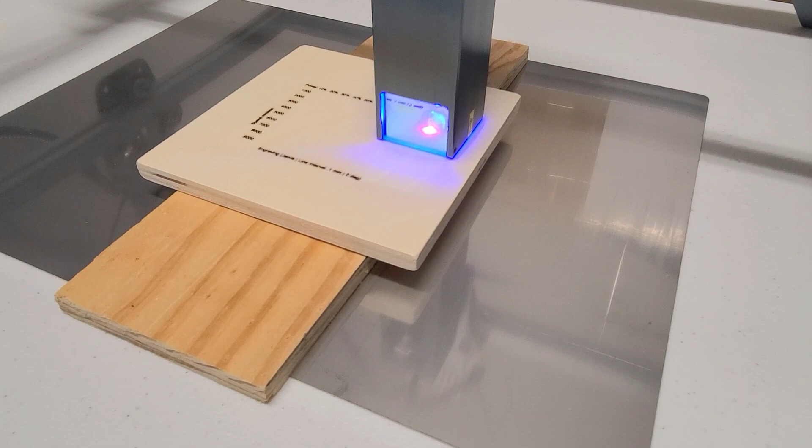Ever want to stick your toes into laser engraving? Well, stick around. This may be just the tool you're looking for.

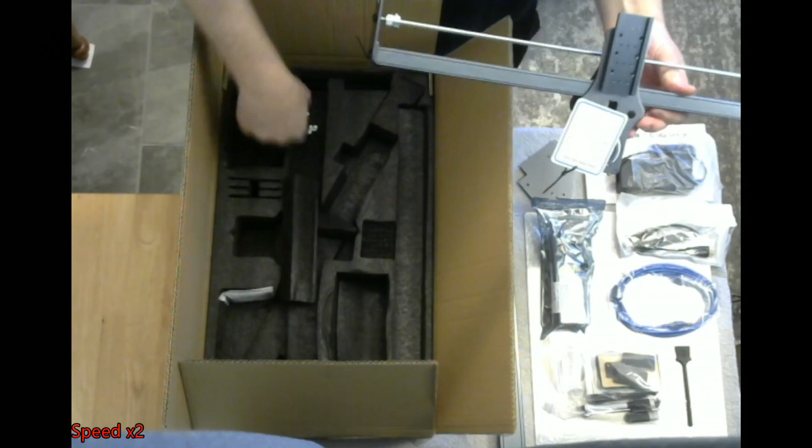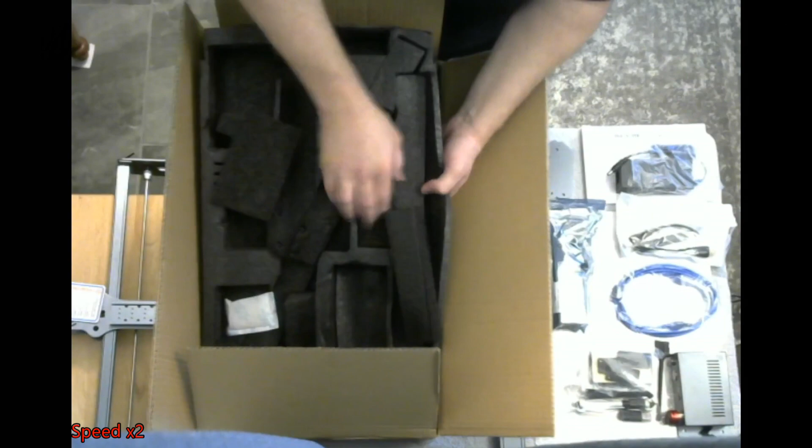One thing to be wary of, and I didn't realize, is that everything's on a single layer. I tried pulling it out looking for a second layer, but everything's on the first layer. They're just hidden in little cubbies with insulating foam between them. So once you think you've found everything, keep digging, because every time I thought I was done, I found another part hidden below something else. Keep digging, pull out the plastic or the foam to make sure that it's empty. You can tell by the weight that there's other things hidden in there, so keep pulling.

One last little plug on just how well they pack this thing: you can even see they put cardboard extra cutouts in the corners to make sure it doesn't get crushed. And it worked, because my Amazon box was crushed, but this thing was perfectly fine.

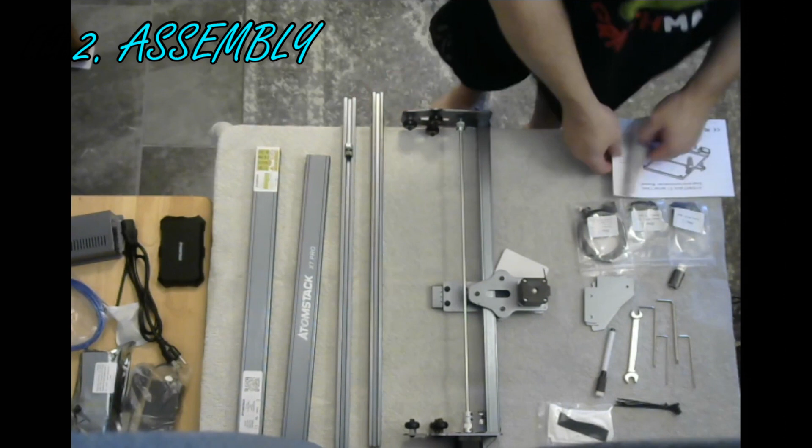Assembly itself is pretty straightforward and easy. It took me a grand total of about 30 minutes to unbox and put the whole thing together, but a good portion of that time was spent trying to show the various pieces off for the camera for this video. If you just dedicate yourself to assembling it, you could probably have it together in about 15 minutes, maybe faster if you don't bother looking at the directions.

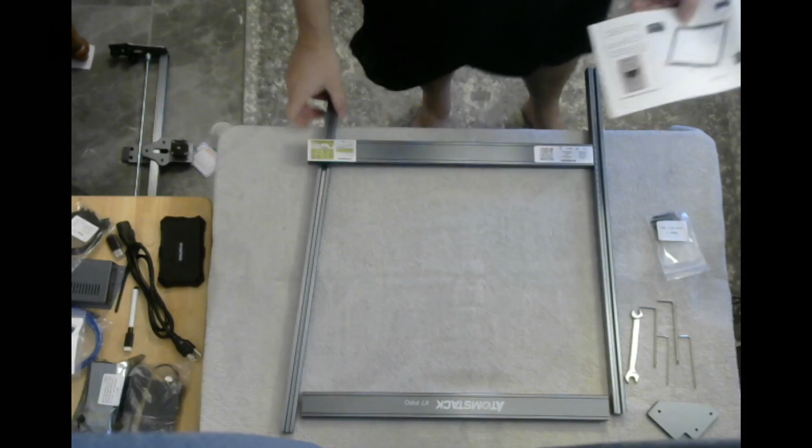First item on the docket is assembling the frame. It has a grand total of 8 screws, and it's nice and conveniently labeled. The bags, each bag is labeled by stage, as is the pictures for the construction. So it makes it really easy, really simple.

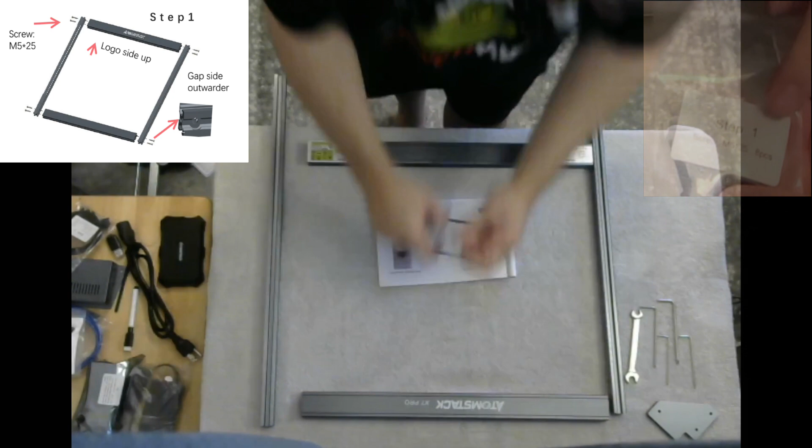The bars on the sides themselves have recessed holes that you can actually see so that screws fit in nice and flush and they don't stick out, so that they're not going to block anything. Make sure when you're laying out the frame that the side with the markings goes on the left side. This is also the side with the limit switch attached.

The easiest way I found to do the screws was to actually insert them by hand. Much faster than trying to do it with the Allen wrench, and there's actually plenty of screws sticking out to get a good grip and put them in most of the way.

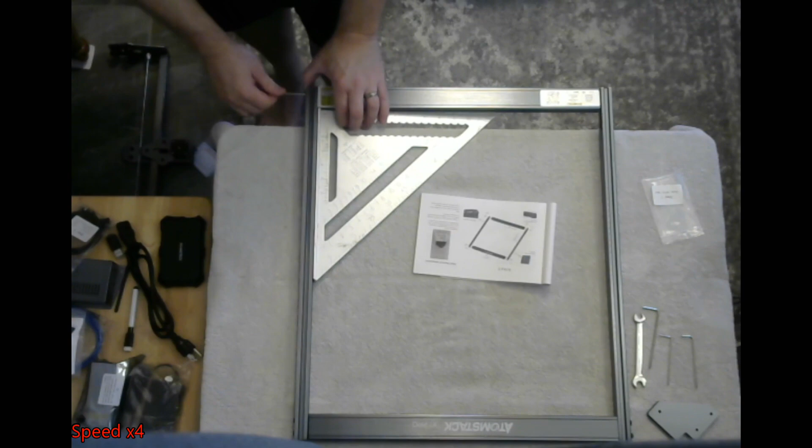Once you've got all the screws inserted by hand, then you can tighten them up with the Allen wrench. Now, while probably not necessary, I elected to use my carpenter square to make sure that all the corners were nice and square so that I wouldn't have any trouble when I put the gantry onto the frame.

Once everything's nice and square, make sure that all the screws are nice and tight. Now do be careful, remember these are just aluminum frames. If you over tighten it, you will strip them out, so be careful.

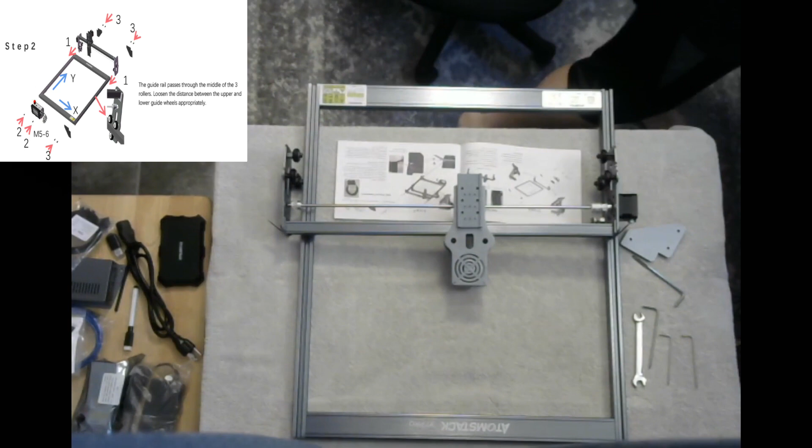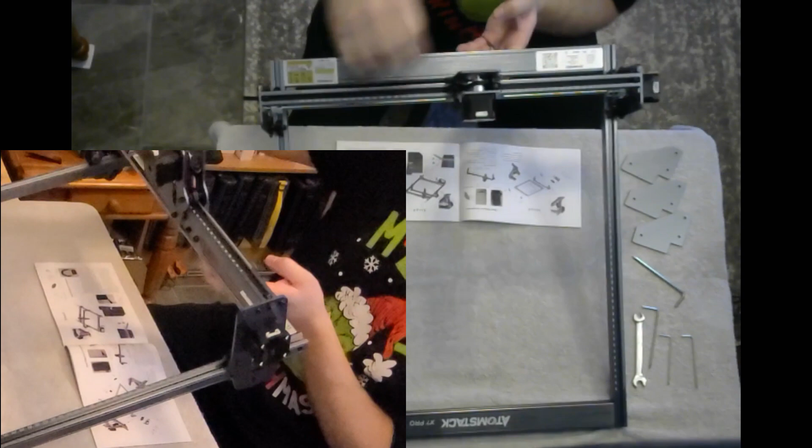In step number 2, we're going to be installing the gantry and the legs. Now this is where the manual and real world differ slightly. The picture I have up now is actually accurate. The one in the book, however, is a little bit vague on the installation process and has some errors in it. First, as you can see, the limit switch blocks gantry install from the front, meaning you have to install the gantry from the rear.

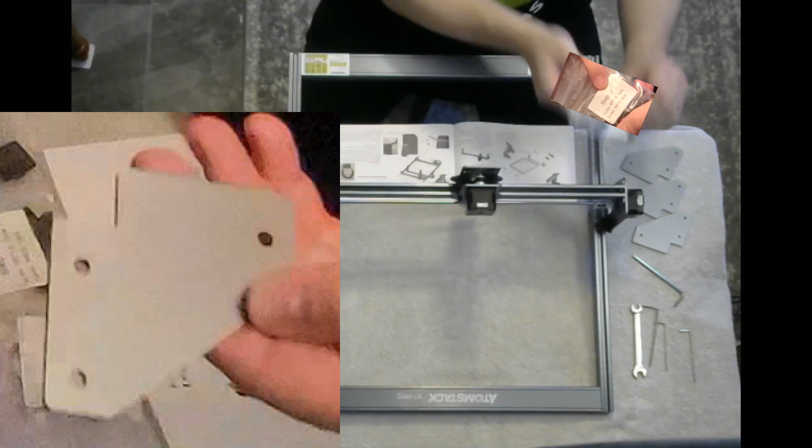Next, we're going to install the legs. There are 3 identical legs with 2 holes on one side and 1 hole in the other with a notch cut out at the 90 point. You're going to install it with the notch aligned to the outer edge and the 2 screw holes aligned to the top so they can line up with the holes in the metal extrusions.

Just as in step 1, there are 8 screws for this step as well, 2 for each one of the legs. You may notice that there's one smaller screw than the rest. This one actually goes into the control panel, which does both the control panel and acts as the front left leg.

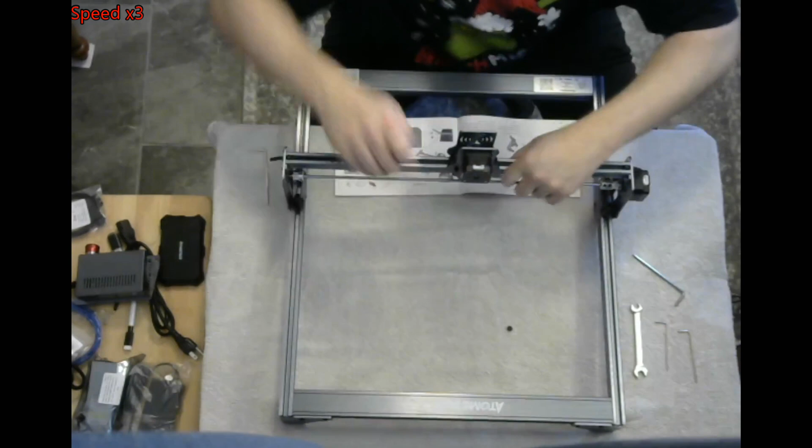This is also where the second error in the manual comes into play. The manual would have you install the front control panel leg now. However, if you do so, it will block you from being able to install the T-nut that's going to lock down the cabling on that side. So leave that one small screw out so that you can move the control panel out of the way, as I'm doing now, so that we can install the T-nut when we get to that point.

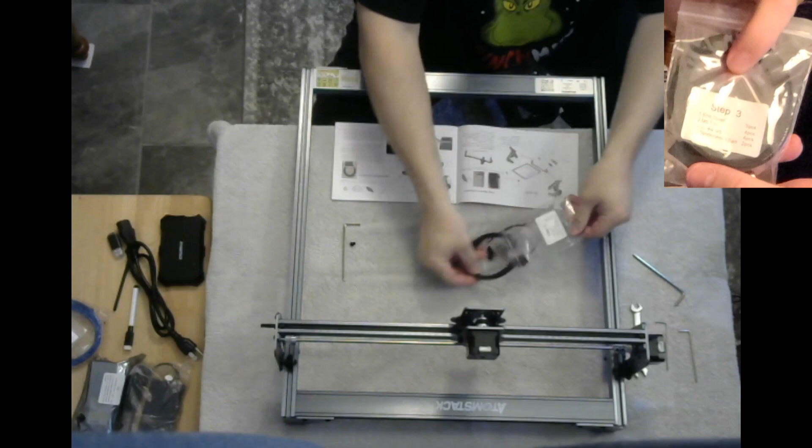And that brings us to step 3, which is by far the most challenging of the steps. Not that it's necessarily hard, but it's kind of tedious feeding the belts through to all the different pulleys. So take your time, go slow, use something that is not sharp edged. I used the Allen wrenches when I was doing it since they're nice and rounded.

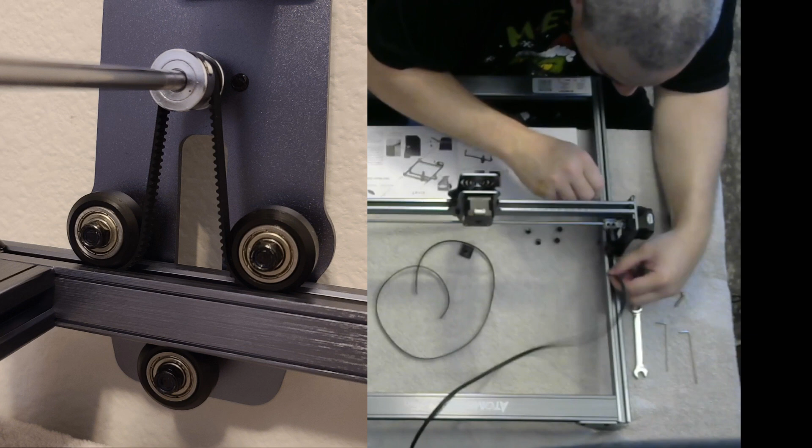That way you don't end up nicking, bending, or damaging the aluminum extrusions and thus causing problems with your wheels or the belt itself. The belt can be fed from either the front or the back. It goes under the outside wheel, through, up, over the sprocket, back down, and under the second wheel. Kind of hard to do, but like I said, patience and time, and it'll be alright.

When feeding the belt through, make sure the teeth are down, pointed at the timing gear. When doing the belts, I recommend feeding them both through before locking them down. It makes it a little bit easier to be able to move the gantry without it actually being stuck or having any resistance.

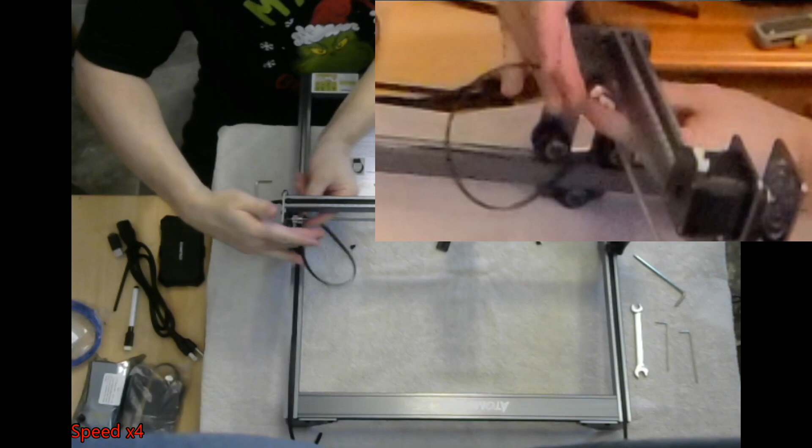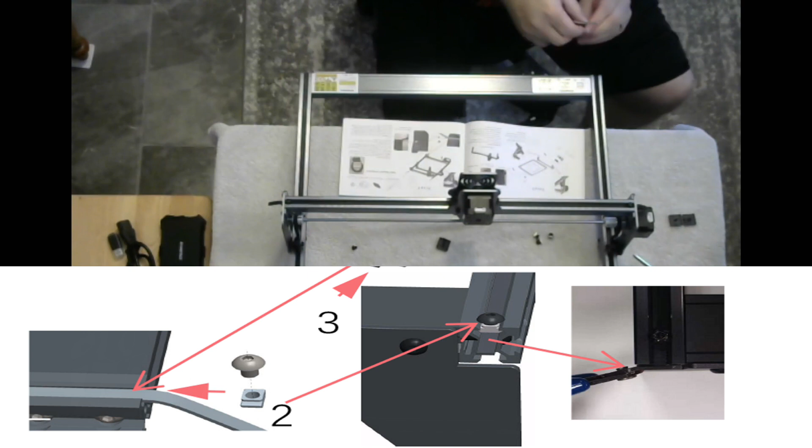Once we've got both belts installed, it's time to install the T-nuts. Essentially, you're just sliding these in and screwing them down to tighten on the belt to hold it in place. As you can see, this is why we left that screw out of the front panel plate. If you had installed it completely, we would have been unable to put that T-nut in and thus couldn't lock down the belt.

Now here's where the book and I differ. The book basically has you splitting the belts evenly between the front and the back. I elected to put most of the excess belt in the back and not to cut it off like the book recommends. I did this because I wanted to have both a little extra belt in case something went wrong, as well as I hope to maybe make and install some kind of belt tensioning device later on.

The lack of any kind of mechanical belt tensioner means that when installing the belt you need to make sure that it's at a proper tension before tightening down the second T-nut. Now when doing this, you want it tight enough that you don't have any play in the gears or in the pulleys, but loose enough that you're not putting any undue stress on any of the mechanics, because it'll wear out the machine that much quicker.

For the most part, just pull it snug, tighten it down, and then flick the belt a little bit. It should give a nice twang sound. Once you're done with the belts, you can install the second screw on the front console panel and complete this step.

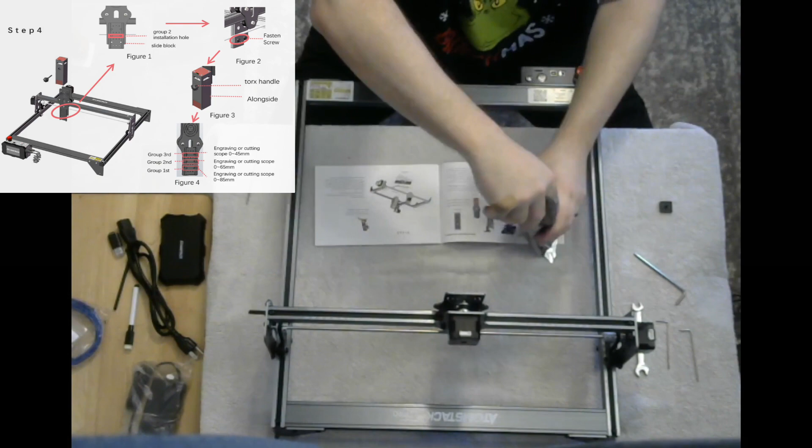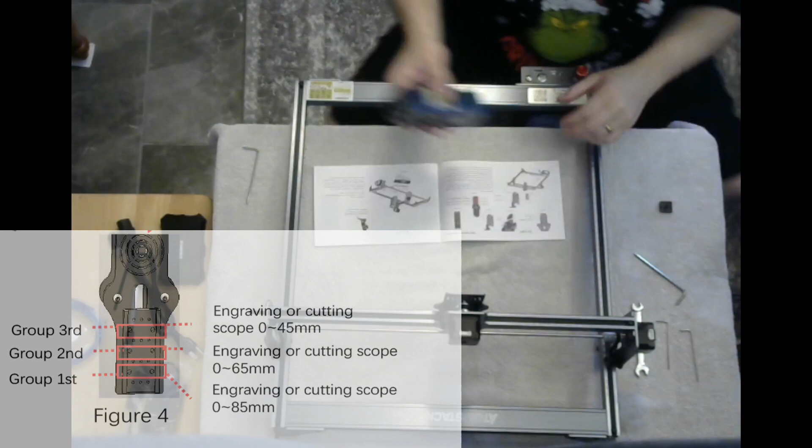Step 4 is arguably the easiest step of the whole process, being that all you have to do is unbag the laser, slide it down, and tighten it on. That being said, the manual does give a little bit of extra instruction so that you can adjust. There is a secondary plate that the laser mounts to that can be moved up and down to increase or decrease the amount of laser focus depending on the size of the items you may be trying to engrave.

Once you have the height adjusted where you want it, locking it down is as simple as twisting the knob on the front until it's snug.

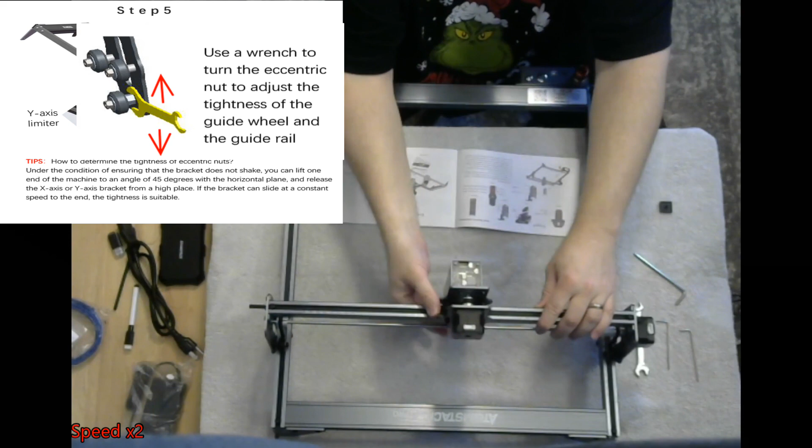In step 5, we'll be tightening the eccentric nuts on the X and Y axis. We want to tighten it down enough that the axis itself doesn't have any wobble or slop. However, we want to be careful not to over tighten them to the point where they will either bog down the motor or cause undue wear on the wheels.

And finally, in step 6, we get to hook up the cables. The cables themselves are zip tied together, connected to the main control unit. Be careful cutting them open or apart so that you don't cut any of the cables on accident.

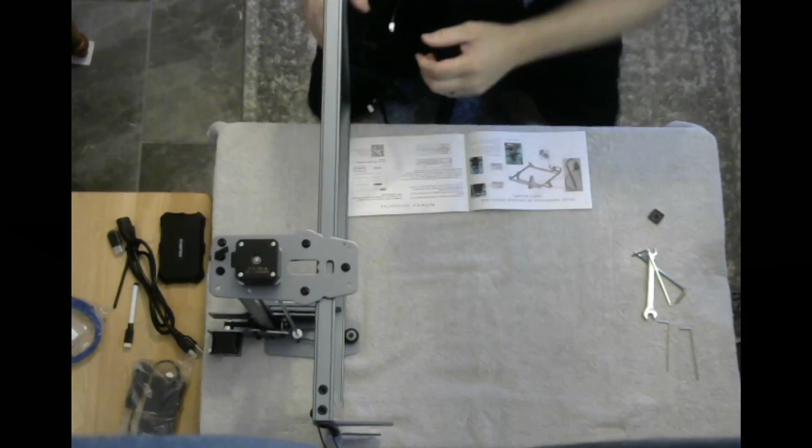Much like everything else on this engraver, AtomStack thought ahead, and the cables are very self-explanatory. The cable lengths and the connector types can only fit to one thing at a time, so it's very obvious what plug goes into what hole.

Once you've got all the cables connected, the next step is to zip tie them to the chassis itself. Make sure when you're zip tying them together that you leave enough slack in the cables that they can make full extension both on the X and the Y axes without getting any binding or plugging, and make sure they're not going to get wrapped or wound around anything else.

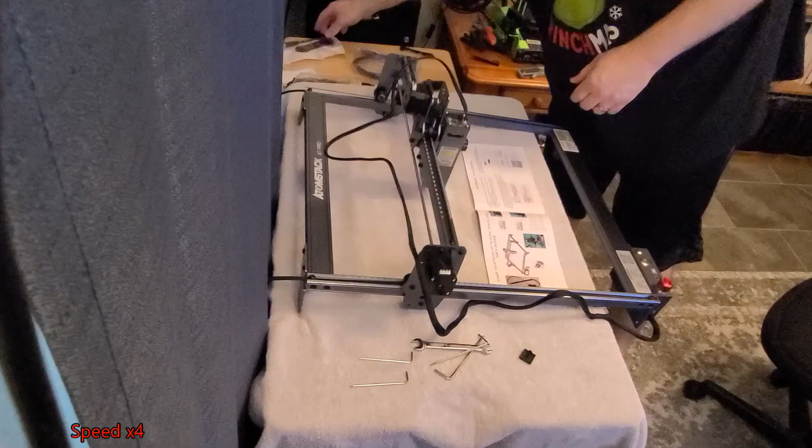Once you've got all the zip ties attached, the last thing to do is to hook up the control display with the supplied HDMI cable and plug it in.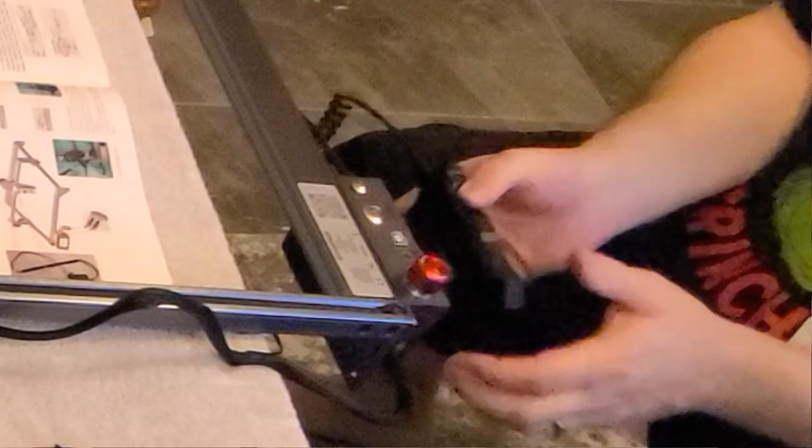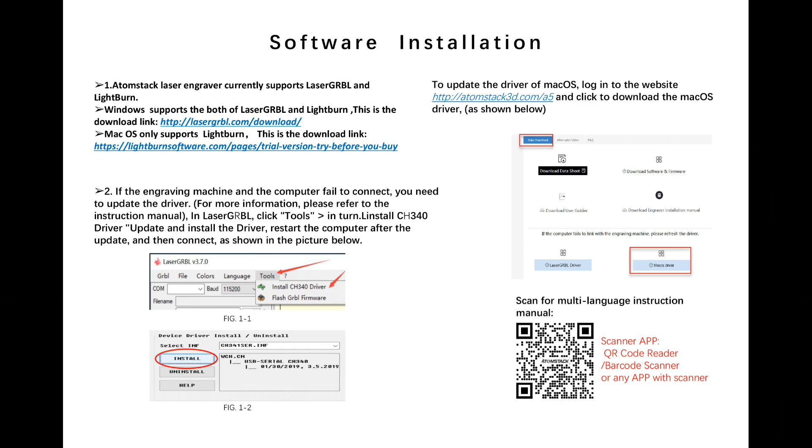The X7 Pro is compatible with both the free Laser GRBL, as well as the paid Lightburn software. The software installation page of the provided manual also gives the links to both of those softwares. However, it's probably faster just to Google them. Other than the links, the manual really doesn't provide any guidance on the software.

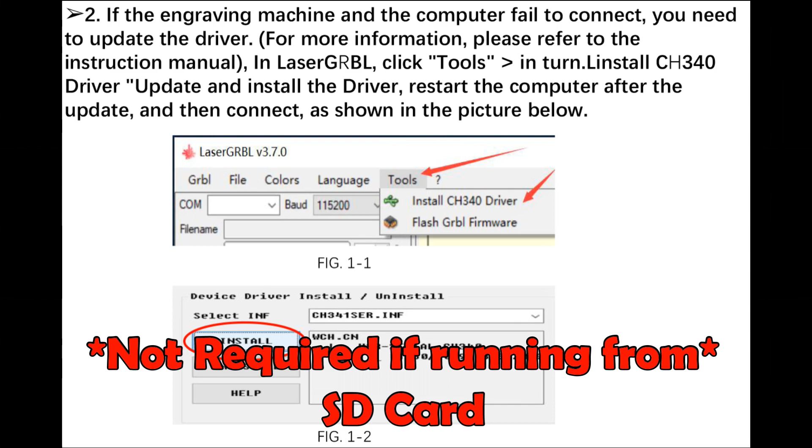Regardless of which software you choose to use, you will need to download the driver so that your computer can actually see your engraver. For those of you who have used the Wi-Fi Arduinos, you've probably already got this installed. If not, again, I will provide a link in the description.

I've elected to use Lightburn. Number one, it has more capabilities according to all of the different tutorials I've watched, and number two, it gives you a 30-day free trial.

After installing the software, you can start your free trial. Of course, you must accept their user agreement. Unfortunately, at the time of recording this, Lightburn is currently unable to auto-detect the engraver, so we're going to have to add it manually. To do this, select the Create Manually button, scroll down until you find GRBL, select it, and hit Next.

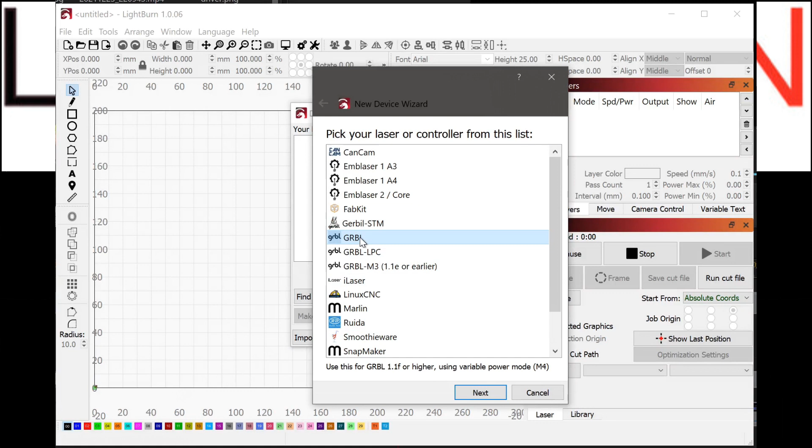From there, select your connection type. For us, it'll be USB, and then you get the opportunity to relabel your connection as well as set up the parameters. Now, if you're like me and you're not sure what the parameters are right off the top of your head, which one's X, which one's Y, no problem. We can find that out from the engraver itself.

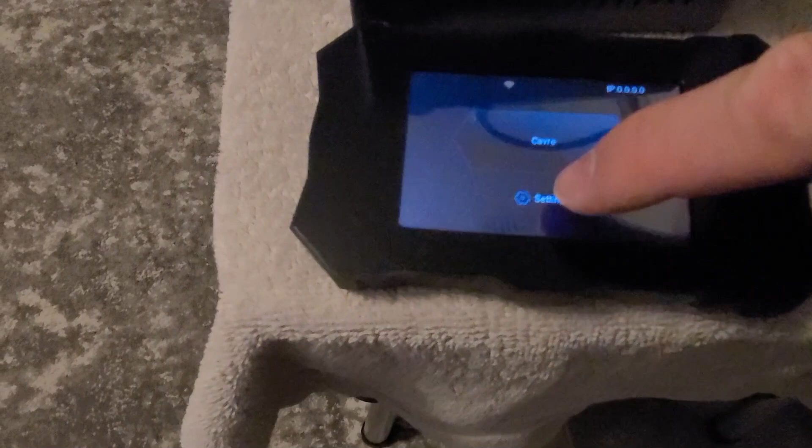Once the engraver is online, select Settings and then select About. This screen will show you your parameters for the engraver.

Now that we know the correct lengths for X and Y, we can enter them in the correct places and hit Next. Our limit switches are located on the left and the front, so we'll leave it selected for left front and then hit Finish. And with that, Lightburn is all set up, hit OK, and we're ready to start cooking.

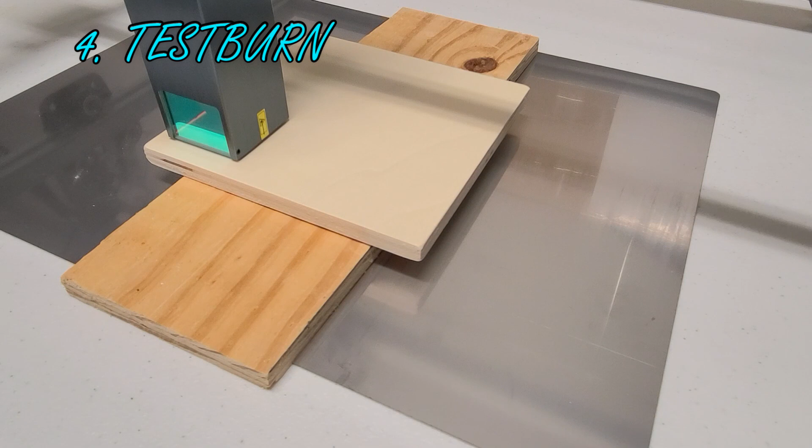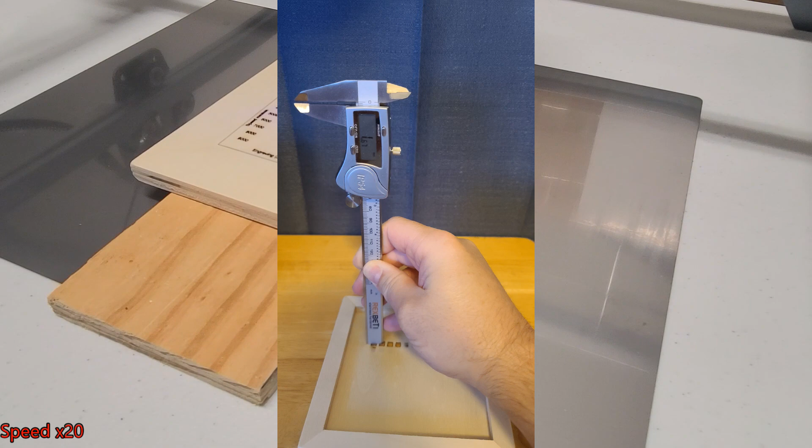To do my initial testing, my wife was kind enough to pick me up these nice little wooden blanks. I believe they're made out of birch, but the label doesn't specify. After running the initial test burn, I was able to measure the thickness, and they ended up being just over 1.5 millimeters.

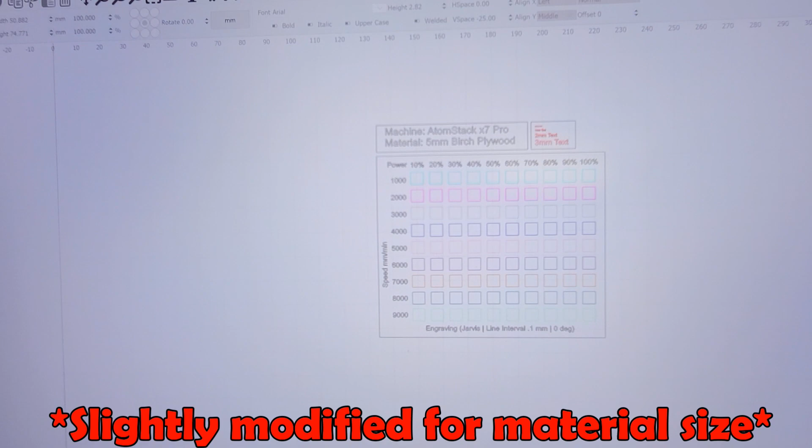For the initial burn itself, I used this grid made by Brandon over at the Make It Break shop, which does a good job of letting you test out both speeds and powers to see what the best settings are for the particular material you're trying to use. I'll put a link in the description so you can download that file and visit the Make It Break shop.

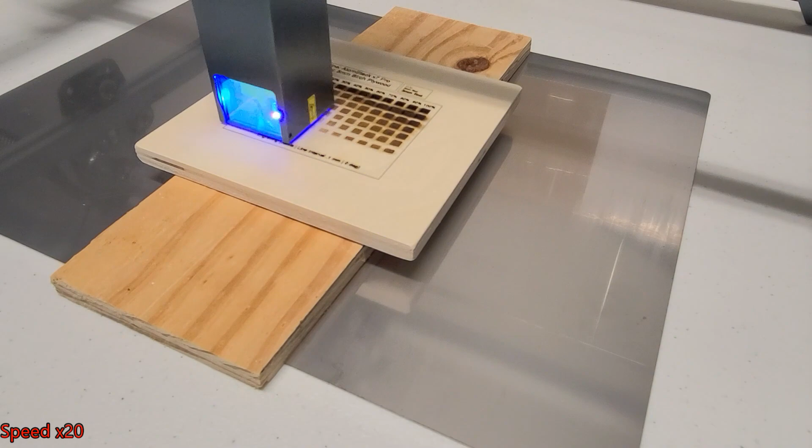The test file took about 15 minutes to run, and when it was done I was able to see which power and speed setting I thought looked best so that I could try out another burn.

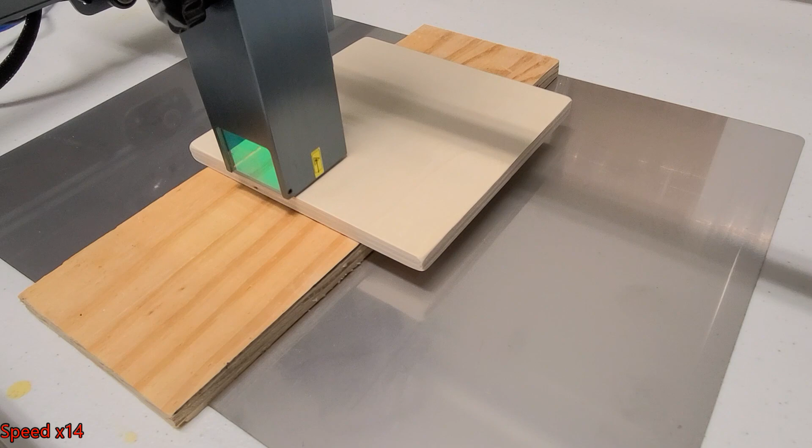Using what I learned from the first burn, I decided to make something a little different and make a picture for my son. Since my son's a gamer like me, I figured I'd find something game related, and since he's been playing a lot of Destiny lately, I figured I'd go with that.

I simply pulled up Google, typed in Destiny logo, and scrolled down till I found something I liked. Ended up going with the Raid logo, and I found one that had a nice black with a white background so that it would just do black and white. I figured for the first real picture, I didn't want to mess with grayscale or anything like that just yet, especially not till I get an air assist installed.

One thing that kind of caught me off guard is that the power to speed scale we used earlier to determine the best burn is in millimeters per minute. For me, Lightburn defaulted to millimeters per second, so the first couple times I tried to make this, it obviously didn't go very well. Once I figured that out and changed the settings inside Lightburn, it worked beautifully.

This image turned out to be about 5 inches by 5 inches after it was burned and took about 45 minutes. However, I did not do the fastest setting. I used 70% power with a medium speed setting for my first one. You could probably greatly increase speed if you tried a higher speed setting with a higher power.

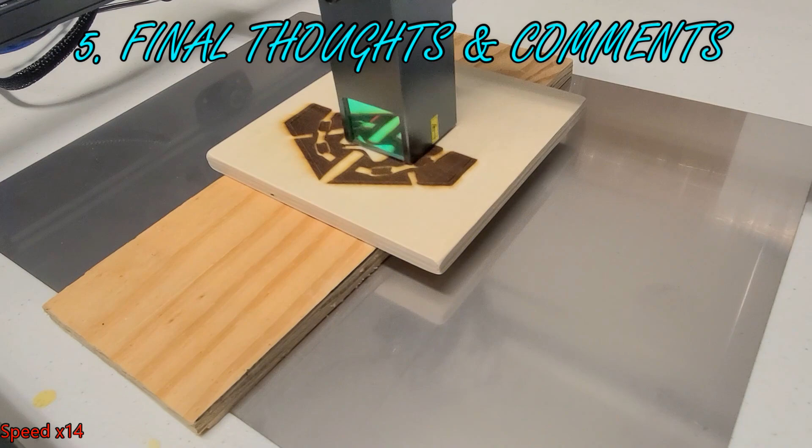While I have by no means done a comprehensive test of the machine yet, so far I'm having a lot of fun with it. I think the thing is great.

I do have several other add-ons and modifications that I want to do to it. Like I said earlier, I'm going to be adding an air assist. I intend to make some 3D printed legs to lift it up so I can put a honeycomb mesh underneath, as well as a spindle for doing cups and glasses, which I also have. I'll be doing videos on those as it comes up.

I know I'm going to invariably get some comments about things I did or did not do in the video, and I know there's a few I wanted to touch on quickly.

The end plugs in the extrusion—I know the manual says to put them in, and I know they're there. I elected not to do so because I want to do some modifications, put some covers on, things like that, for my 3D printer.

Number 2, the zip ties. I know I didn't zip tie the cables on very securely, but again, I'm going to be adding an air assist, so I'm going to have to take all those off and add in the hose later, so I didn't want to waste anything I didn't have to. I only put enough in there to do the initial testing.

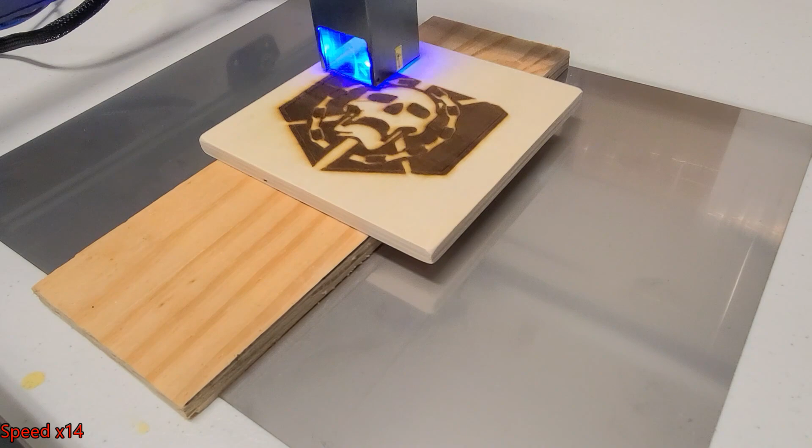The online manual—you can get that from the link in the description below, coming from AtomStack. It's a much better manual than the one that comes with the printer itself, so I highly recommend downloading and using that for both the assembly and the use of the machine.

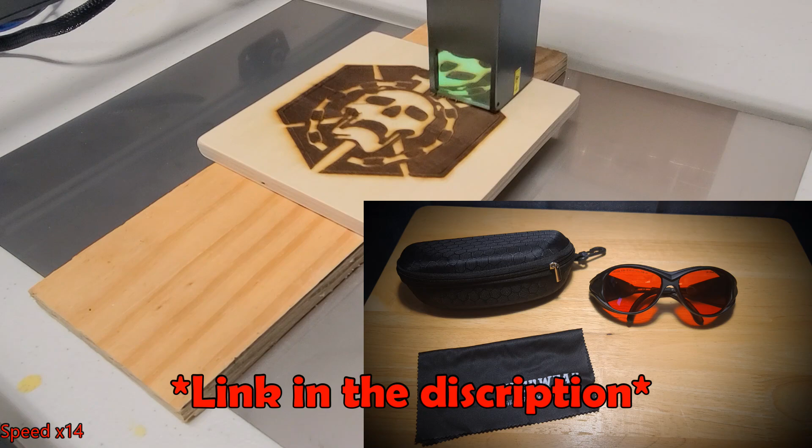Lastly, make sure if you're going to be doing laser engraving, get yourself a good pair of glasses. This printer operates at 455 nanometers, so whenever you're buying safety glasses, ensure that they match the frequency of the laser you're using. That way you're protected. Yes, this laser has almost full coverage protection, but you can never be too safe.